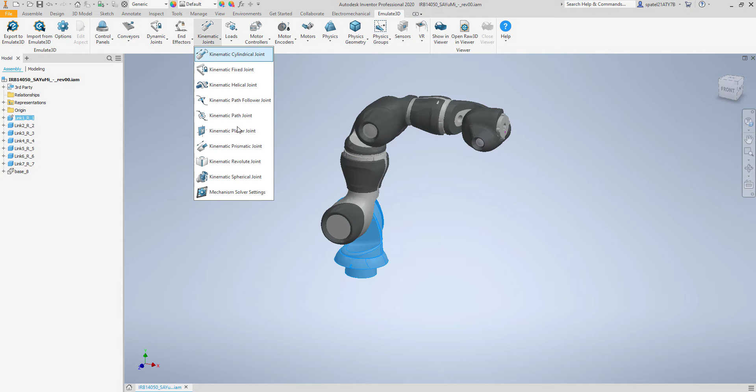I'm going to start off by hiding this base component, which will allow us to easily select the correct faces for our first joint. I'll select my base from the hierarchy and toggle its visibility. Then I'll click on my first part, link 1, go to the Emulate3D tab, go to kinematic joints, and add a kinematic revolute joint.

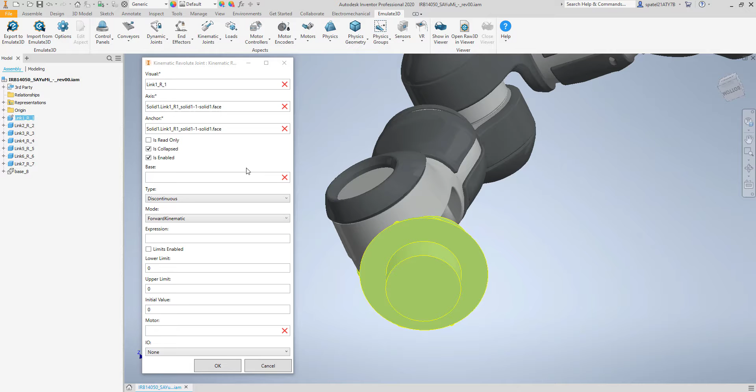For this joint we need to define a few things. The first is the axis, which our part will rotate around, so I'll select a face down here. Next is the anchor, so I'll pick the same face, which positions the anchor point in the center of that face. We can leave the other settings as they are, so I'll press OK. That's our first joint made.

Now that I've made that joint, I'm going to hide this part by toggling its visibility. Then I'll select link 2 from the hierarchy and add the next joint: kinematic revolute again. Again, we need to select the axis and anchor.

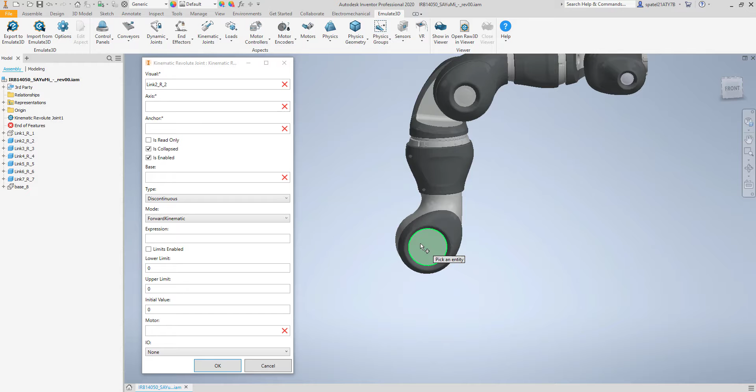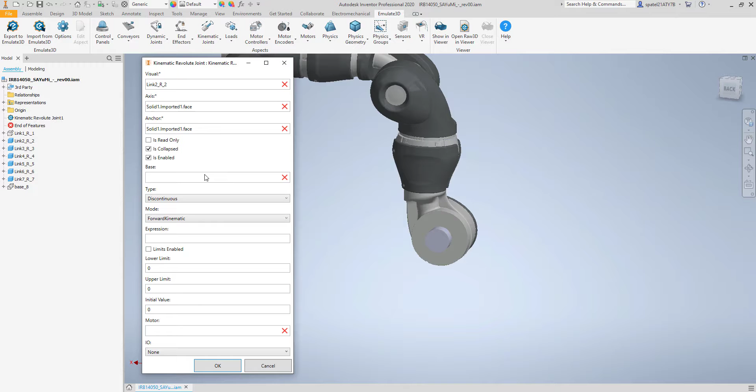I'm going to rotate and use this face over here. I'll click on the axis field and then the face, then the anchor field and the face again. Because this part is linked to our link 1 part by a revolute joint, we need to set the base property on this part - the base for link 2 needs to be link 1. Then we can press OK.

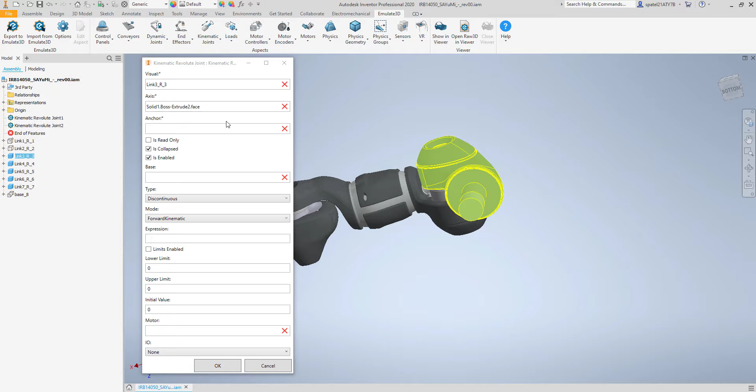Again, just need to disable the visibility and add the next joint. I'm going to select this bottom face for the axis and anchor, and for the base I need to select the previous part, which is link 2, and press OK.

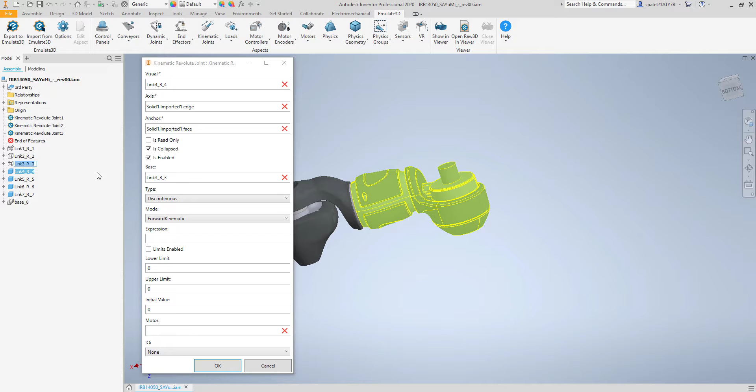Now I'll toggle the visibility, select my next part, go to kinematic joints, kinematic revolute, select the axis and the anchor, and choose the base from the hierarchy, link 3, and hit OK. Now I can hide this part.

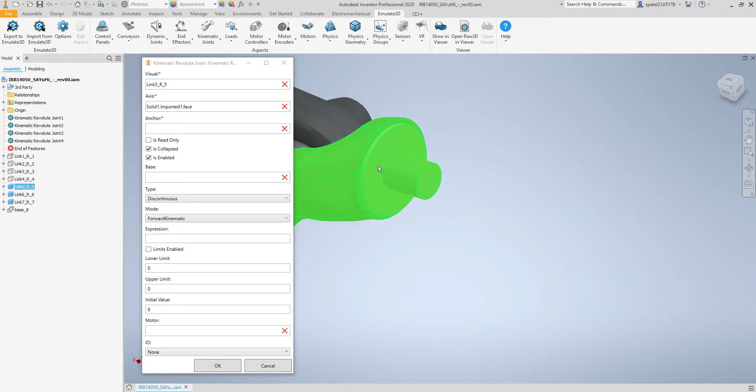Add on my 5th joint, revolute again. Select the visual, select the axis, and select the anchor. Again, set the base - this time it's link 4. Hit OK, then hide the part.

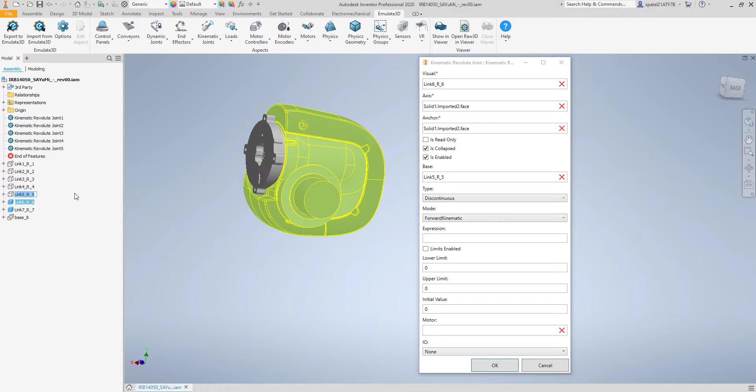Then link 6, kinematic joints, revolute. Let me move that to the side. I'm going to use this face here. I'll select that one, and then the same face again for the anchor. For the base, I pick the previous part, link 5. Hit OK.

That's my 6th joint done. Hide that. Now on my 7th, kinematic joints, revolute again, and I'll pick this back face here for the axis and anchor, and then don't forget to set the base.

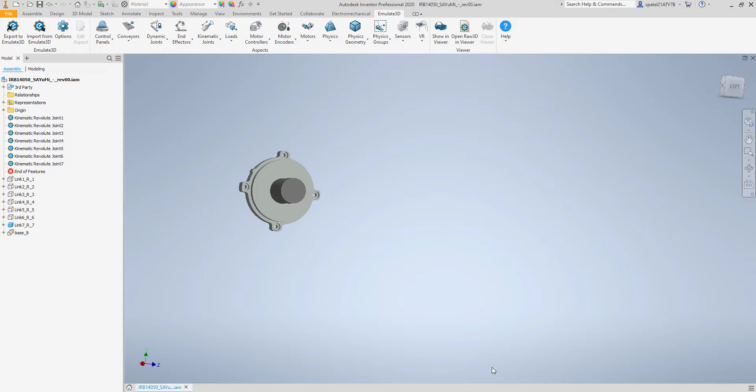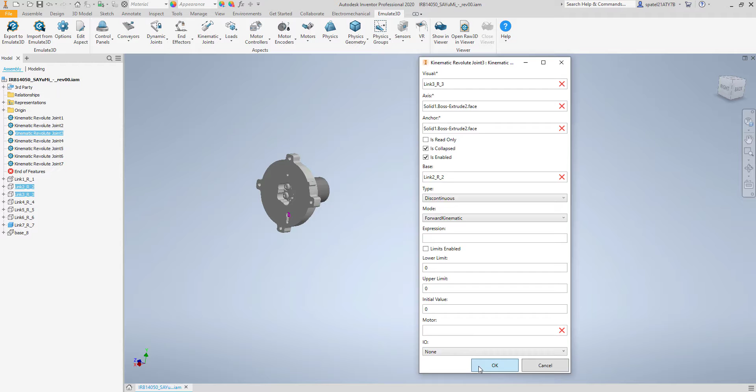I've now set up my 7 joints, and you can see all 7 of those joints here in the assembly hierarchy. If you want to edit one of these joints, you can click on it and hit edit aspect, which brings up the details. If you need to change something, for example add limits, you can change that here, press OK, and that will enable limits. I'm just going to unhide all these parts.

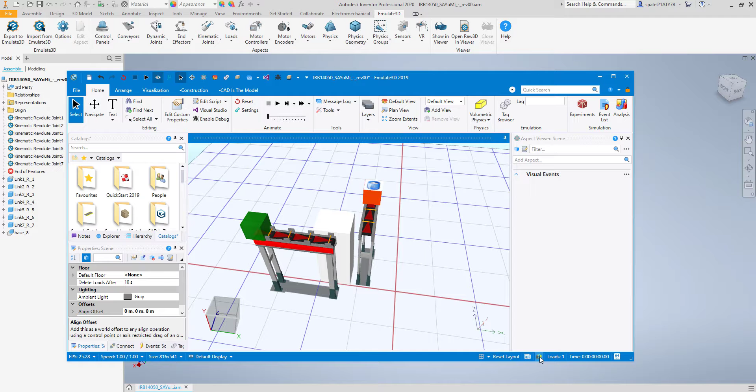We're now ready to export this straight into Emulate3D. So unhide that one as well. I've got Emulate3D open here - just need to turn on the web server by pressing this little globe icon in the bottom corner. Then inside of Inventor, click Export to Emulate3D. We've got this little loading bar telling us the progress. Hopefully in a few seconds we'll see our robot inside our model.

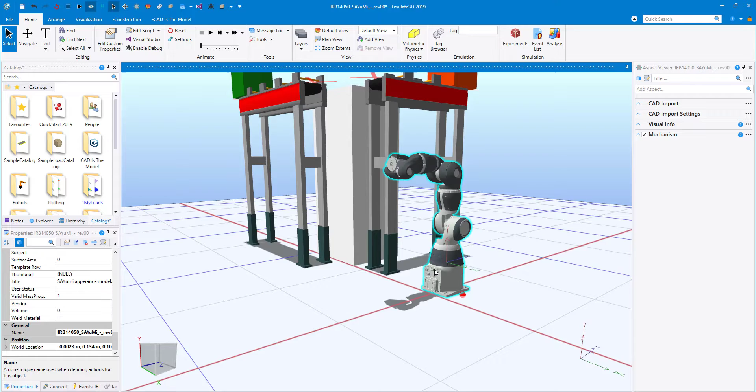You can see there it is, down here at the bottom. The first thing I'm going to do is position it over here. Then we'll attach the robot framework to it, and we'll get it to pick up small boxes and place them on the next conveyor line for us.

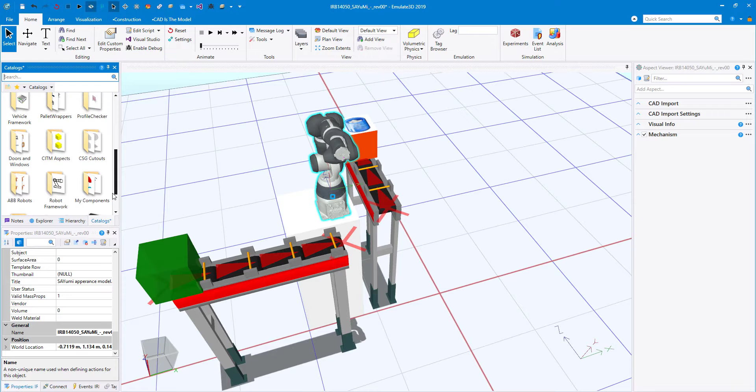So there's a couple of things I need to do. The first is I need to add a tool plate to my robot, and then I can easily snap a tool onto it. I've got a pre-made tool plate that I normally just drag and drop into the model, which I like to use.

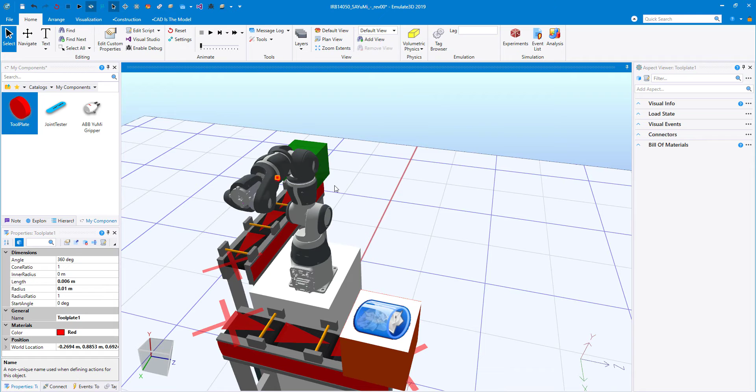Just going to select the back face, and then because it's actually the wrong orientation, I'm just going to rotate my robot first, select the back face, and I'm going to snap it to this midpoint here. And now in the hierarchy I need to move my tool plate to be under my link 7. So when my link 7 moves, which is the final axis of our robot, our tool plate is going to move with it. So it's all going to be stuck together now.

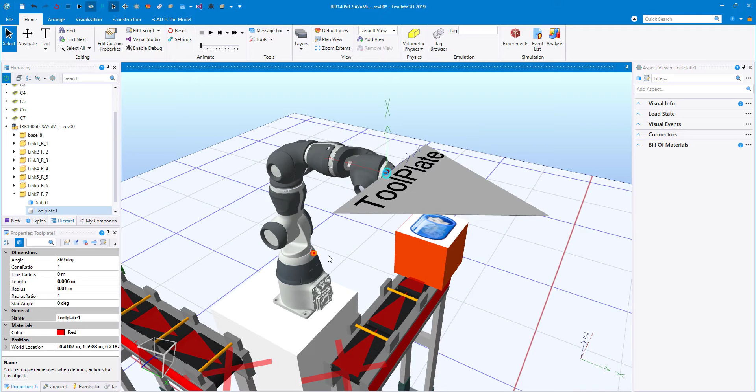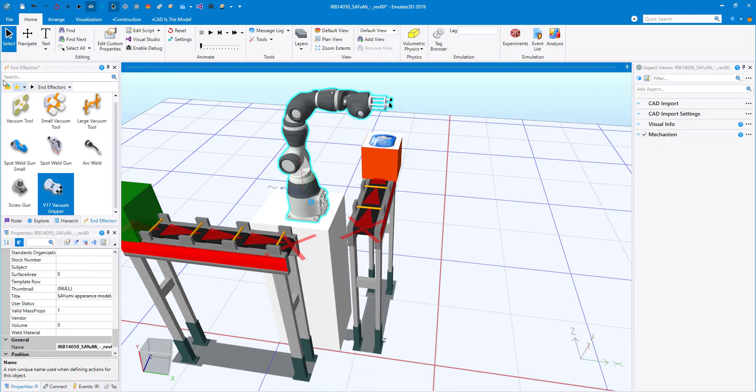The next thing to do is to add on a robot tool. So I'm just going to use one of the pre-made tools from the robot framework inside the end effectors catalog. I'm going to use this smaller V17 vacuum gripper. So now I have my robot, it's got its tool plate and its tool. I'm just going to reposition it a tiny bit there. And now I can go back to my robot framework catalog and add the robot controller to the model.

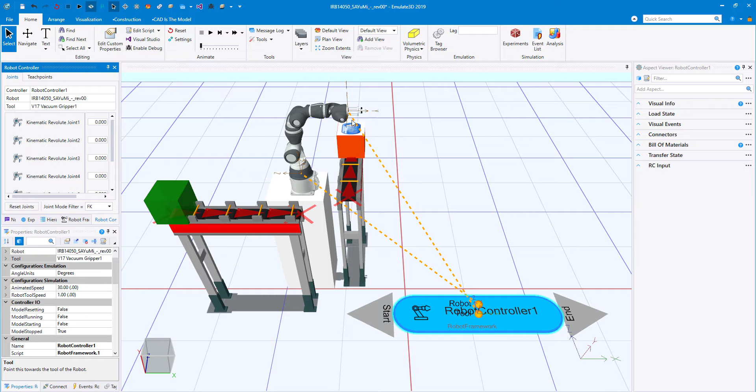On the controller, we need to specify two visual references. So we have our robot visual reference and our tool visual reference. So I'm going to click and hold on the robot one and select our Cobot. And then for the tool, I'm going to click and drag and select the vacuum gripper tool we added. We then need to connect up the start and end connectors. I'm going to connect it to the end of that conveyor and the start of that conveyor.

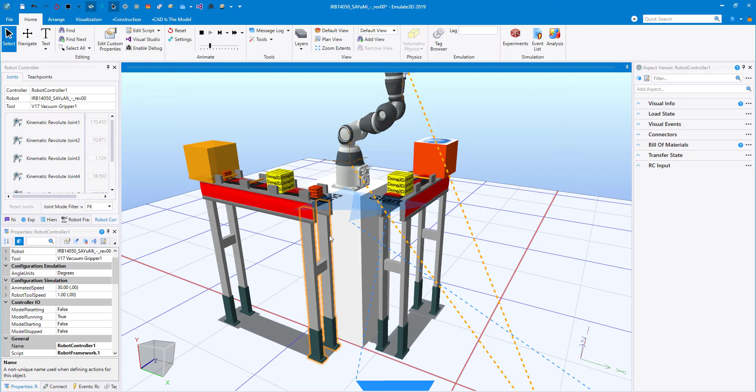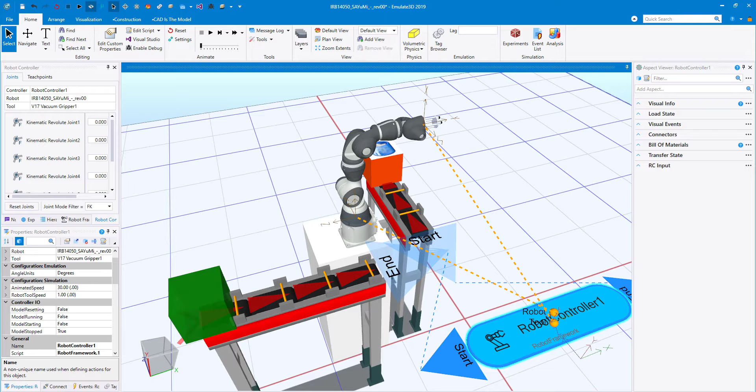And now when we press play, our robot moves, picks up our box and drops it off. So one thing we might want to think about doing is adding some limits to this robot, because you can see right now it's doing the pick and place, but it's doing it in quite an odd manner. So you could probably fix that by adding some more limits to our robots. So I'm going to go back to Inventor and we'll add on those limits.

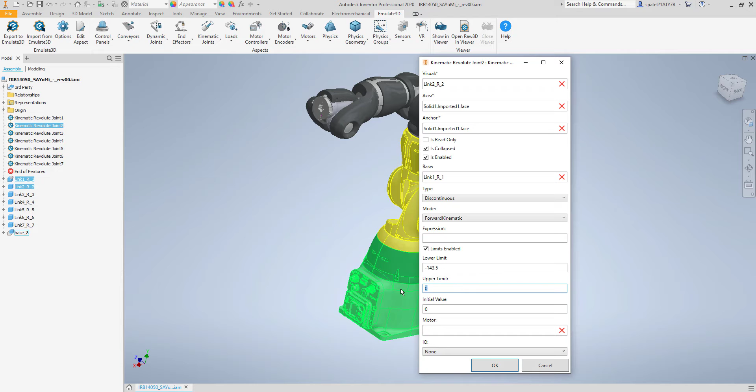So for our first joint, we want to add an upper and lower limit. So the lower limit is -168.5 and the upper is 168.5. For our joint 2, we want to add some more limits as well, so -143.5 and 43.5, and hit OK. Joint 3 as well. The lower limit is -123.5 and the upper limit is 80.

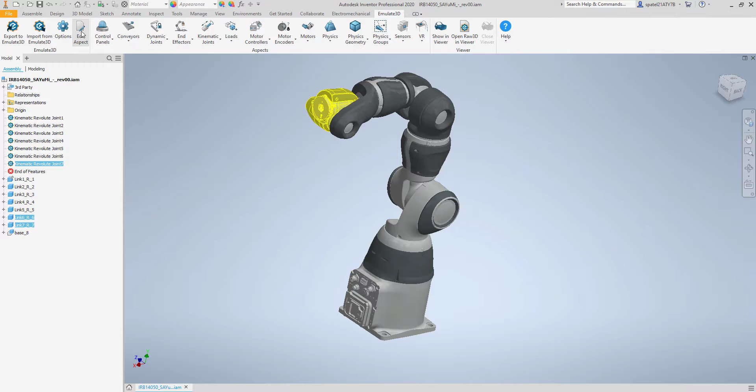Joint 4, we don't need to add any limits because it's -290 to 290 degrees, and because the range is over 360 degrees, we don't bother adding limits. For axis 5, the lower limit is -88, the upper limit is 138. Axis 6, again this is -229 to 229 degrees, and because the range is greater than 360, it's best not to add limits. And then for the final one, link 7, click there on the joint, not the part. I'm going to add in the limits of -168.5 and 168.5, and we'll press OK.

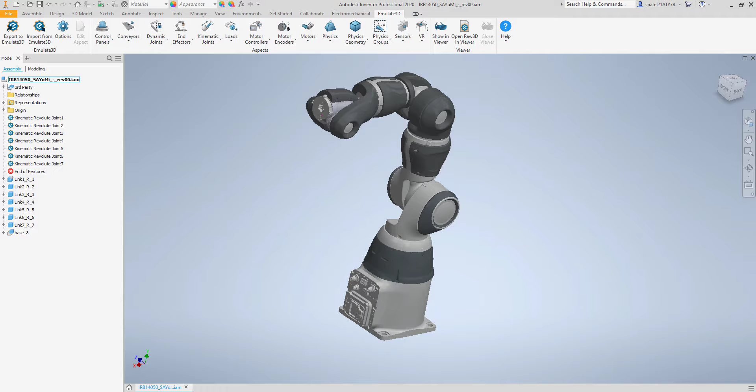So we can just import this straight back into Emulate3D. Before we do that, I'm just going to detach the robot tool, and then I'll do export to Emulate3D. So if we switch back to Emulate3D, we can see our new robot over here. So it looks exactly the same, but it actually has the limits now.

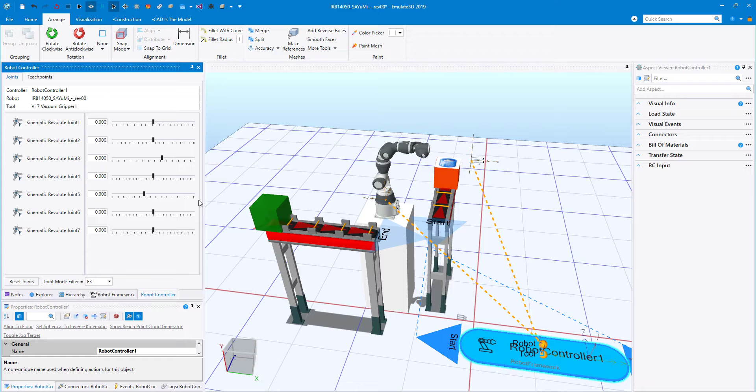So the easiest way to check this is to just select the robot controller, so it updates, and then if we just expand the robot controller window, you can see our 7 joints now have limits applied to them. So if I spin this top round, it's now between 168 and -168, and for joint 3, for example, it's between 80 and -123 now. So we've successfully applied our limits.

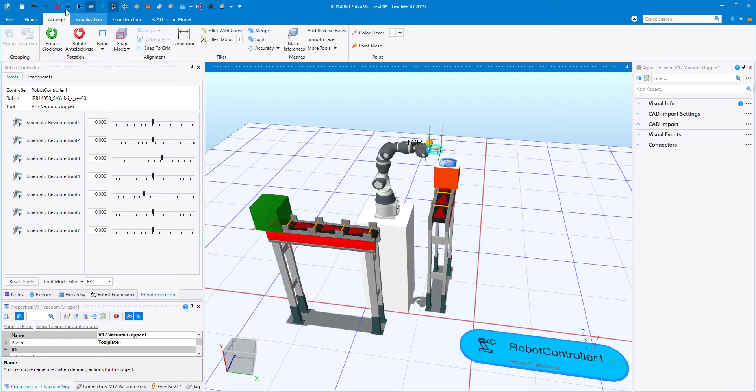We can now just reattach our robot tool and press play. And our robot now picks up our boxes and then places them on the next conveyor. So one thing you might notice is this robot is reaching up really high just before picking or placing.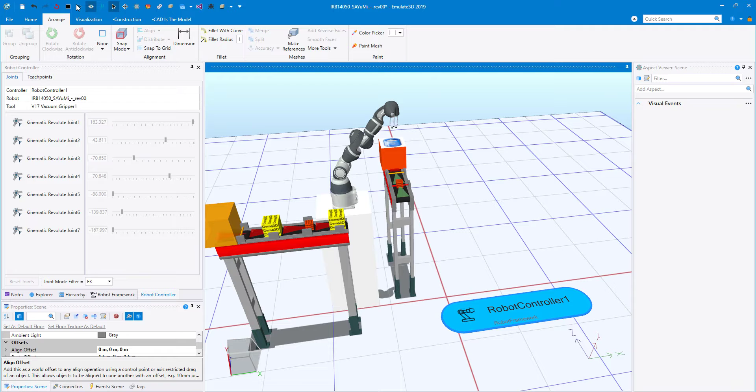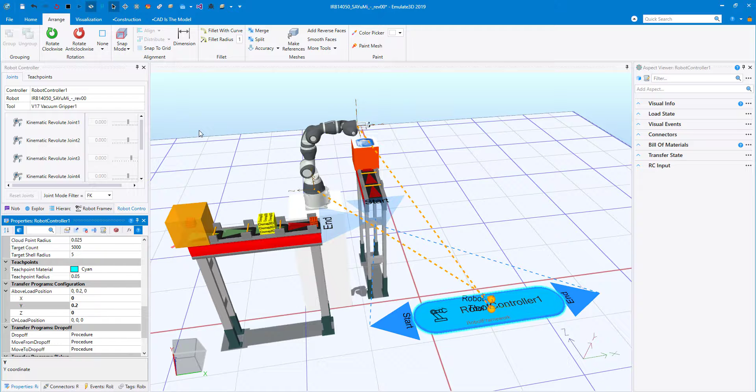And we can change that behavior just by clicking on our robot controller. If we go to its properties, there should be an above load position, so this one here. So we can change that to be 0.2 meters instead, and we can see how that affects our robot. So you can see our robot now does a slightly different movement as we've changed the above load property on it.